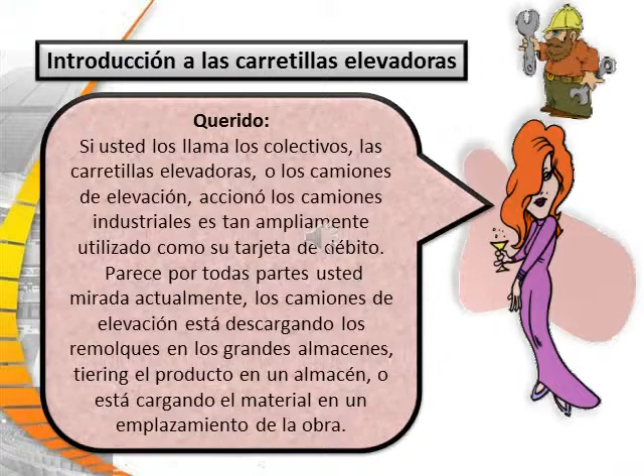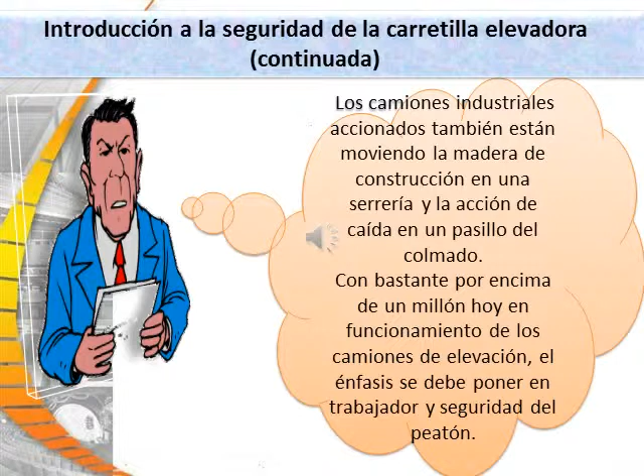Powered industrial trucks are also moving lumber in a sawmill and dropping stock in the grocery store aisle. With well over 1 million trucks in operation today, the emphasis must be placed on both the worker and pedestrian safety. This program will help you understand OSHA safety and health regulations governing these pieces of equipment, in addition to providing you with assistance in developing a training program for your lift truck operators, as well as other affected employees.

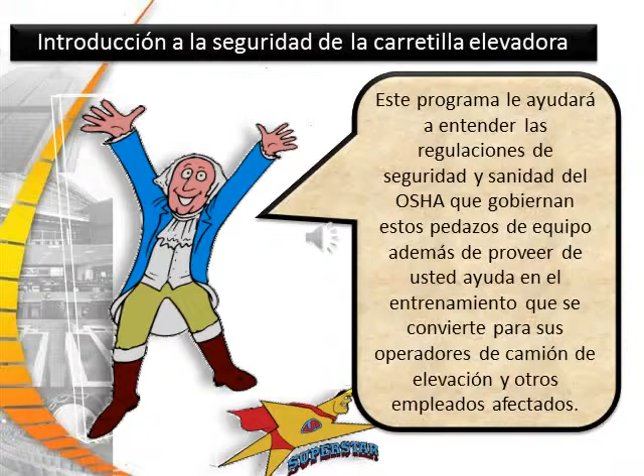What are the objectives of this program? Well, my fellow Americans, here they are. Review the OSHA Subpart N, 29 CFR 1910.178 for powered industrial trucks, and we'll discuss the fundamental safe work practices for the operation of powered industrial trucks.

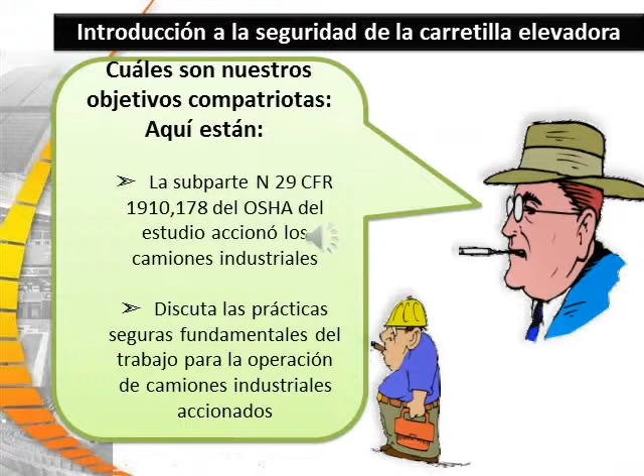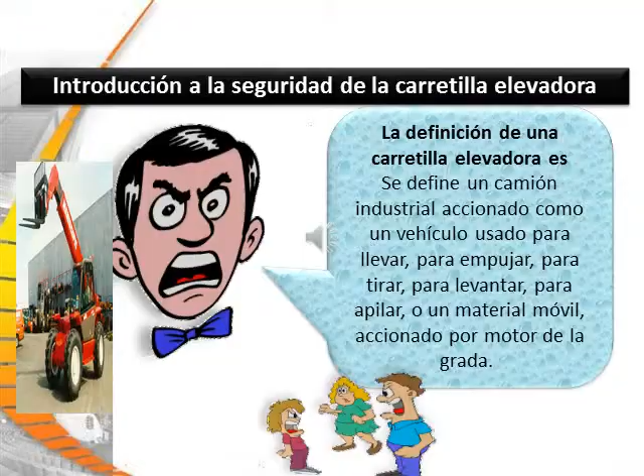The definition of a forklift is a powered industrial truck with a mobile, power-driven vehicle used to carry, push, pull, lift, stack, or tier material. Vehicles not covered by the powered industrial standard are compressed air or non-flammable compressed gas operated industrial trucks, farm vehicles, vehicles intended primarily for earth moving or over-the-road hauling.

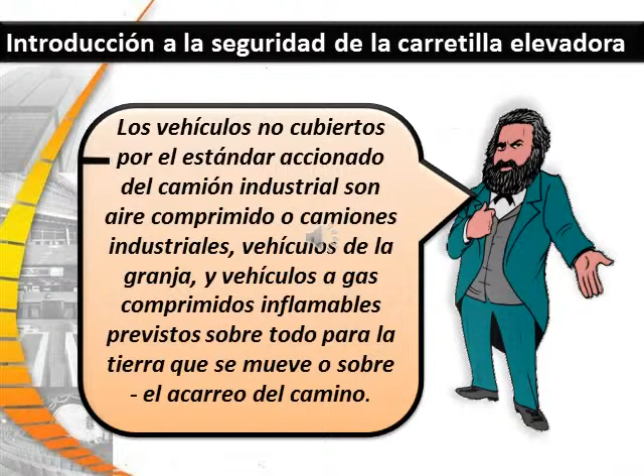Part 2, OSHA forklift requirements. Design and construction of powered industrial trucks must be done in compliance with ANSI, American National Standard Institute, B56.1. B56.1, 1993, is a safety standard for low-lift, high-lift trucks, in its latest revision. All nameplates and markings must be in place and be readable under the standard.

All modifications and additions which affect the safe operation and capacity must be approved by the manufacturer. Data labels must be changed accordingly, and this approval must be in writing from the manufacturer. If using front-end attachments other than the manufacturer's, the truck must be marked identifying the attachment, listing the approximate combined weight of the truck and attachment at the maximum elevation with a center load.

Most vertical mast forklifts are equipped with FOPS, Falling Object Protective Structures. A load backrest, or LBR, must be provided when handling small objects or unbanded units. The LBR must be capable in size and strength to prevent the load or any part of the load from falling toward the operator. The LBR must not interfere with the operator's visibility and guard openings must not be larger than 6 inches in one of the 2 dimensions.

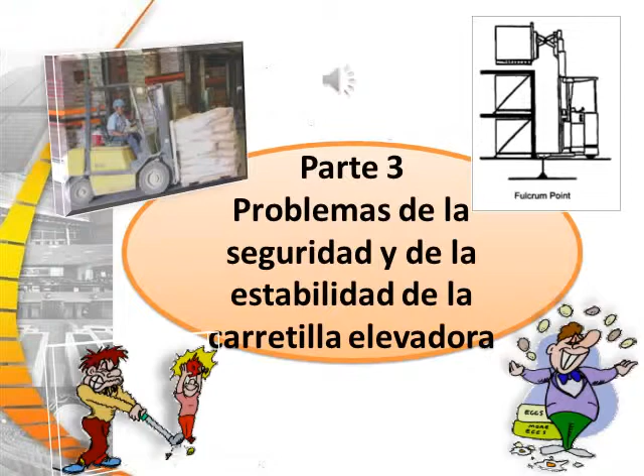Part 3, Forklift Safety and Stability Issues. The lift truck is based on the principle of 2 weights balanced on opposite sides of a pivot point. The forward wheels are the fulcrum. This is the same principle used for the teeter-totter. A properly loaded lift truck does not exceed the rated capacity of the truck listed on the truck's data plate.

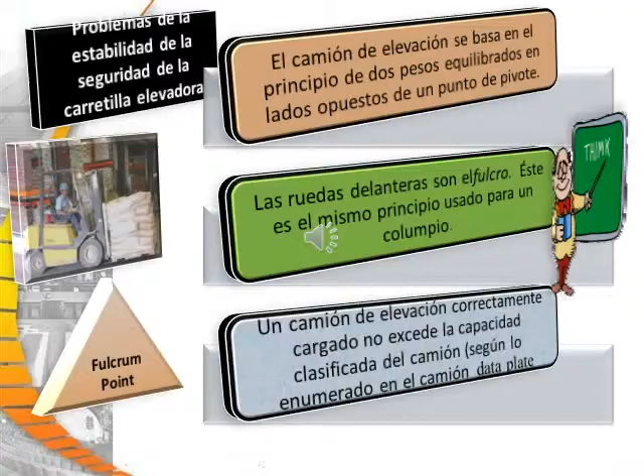The center of gravity, or CG, of any object is a single point about which the object is balanced in all directions. Every object has a CG. The lift truck has moving parts and therefore has a CG that moves. The CG moves forward and back as the upright is tilted forward and back. And as you can see, the CG will move up and down as the upright moves up and down.

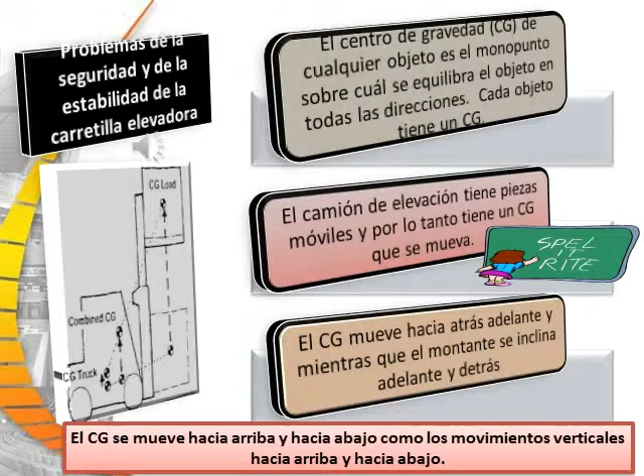When a lift truck picks up a load, the truck and load have a new combined CG. The stability of the lift truck is determined by the location of its CG, or if the truck is loaded, the combined CG. In order for the lift truck to be stable, the CG must stay within the area represented in the triangle.

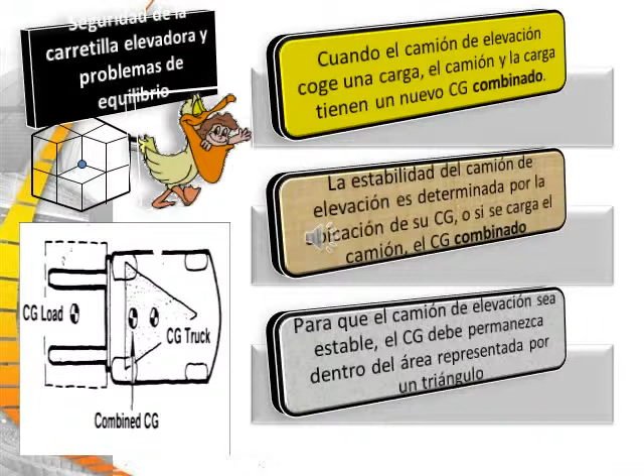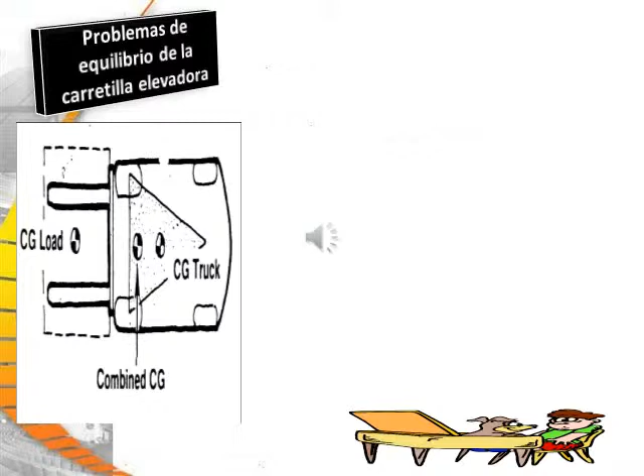A triangle is drawn between the drive wheels and the pivot of the steering axle. This triangle is routinely called the stability triangle. Think of riding a tricycle around corners, and you'll lean forward and you will overturn as you move your CG to the nearest part of the triangle. If the CG moves forward of the drive axle, the truck tends to tip forward, longitudinal. If the CG moves outside the stability triangle, the truck tends to turn on its side, lateral.

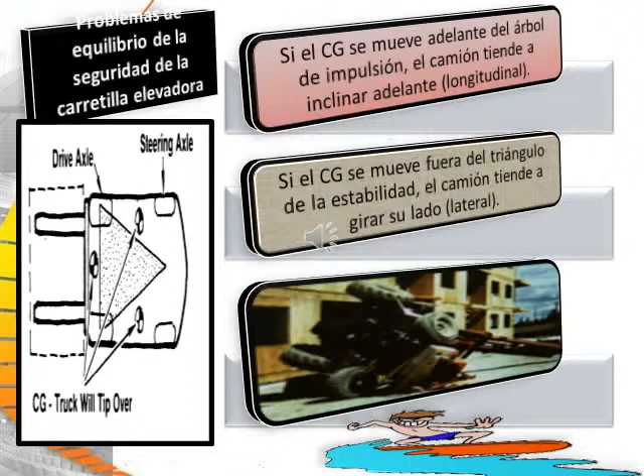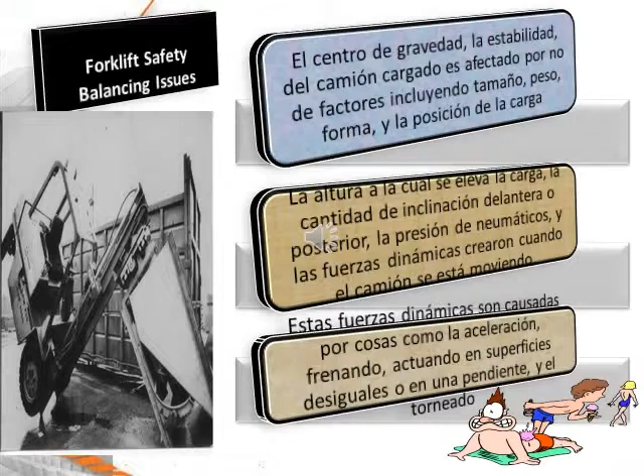The center of gravity, the stability of the loaded truck, is affected by a number of factors including size, weight, shape, and position of the load. The height to which the load is elevated, the amount of forward or backward tilt, tire pressure, and dynamic forces created when the truck is moving. Those dynamic forces are caused by things like acceleration, braking, operating on uneven surfaces, or on inclines or turning.

These factors must be considered when traveling with an unloaded truck as well. An unloaded truck will tip over on its side more easily than a loaded truck with its load in a lowered position. A recent test was done at a lift truck manufacturer's technical center involving a 5,000-pound capacity unloaded lift truck.

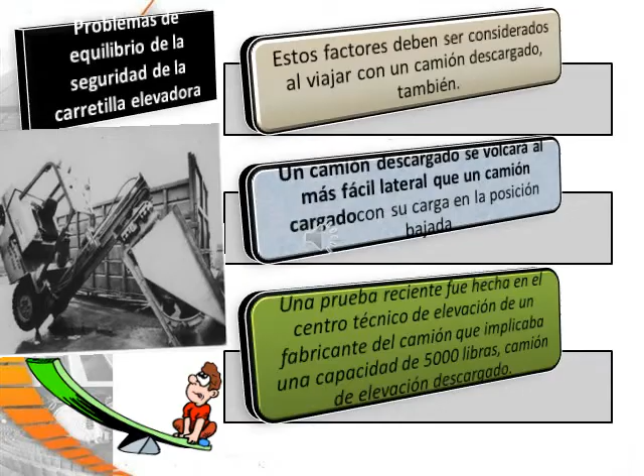In the test at the test center, the three-stage mast was fully extended and tilted back. One man was able to tip the truck over simply by grabbing and pulling the overhead guard.

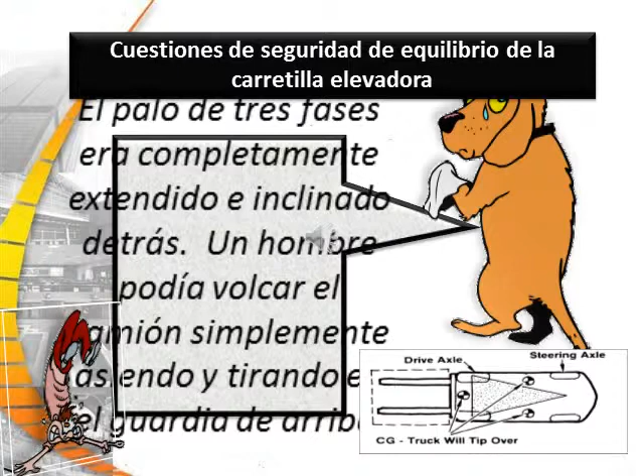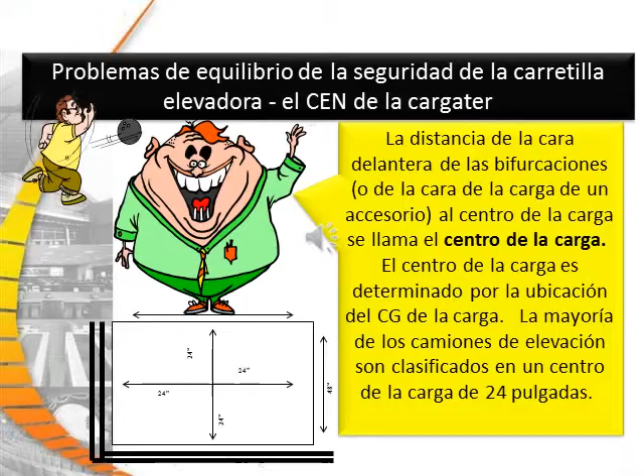The distance from the front face of the forks, or the load face of the attachment, to the center of the load is called the load center. The load center is determined by the location of the CG of the load. Most lift trucks are rated at a load center of 24 inches. When the load is carried a greater distance than the load center, the maximum capacity of the truck is exceeded. The use of special attachments instead of forks will also reduce the nominal capacity of the lift trucks.

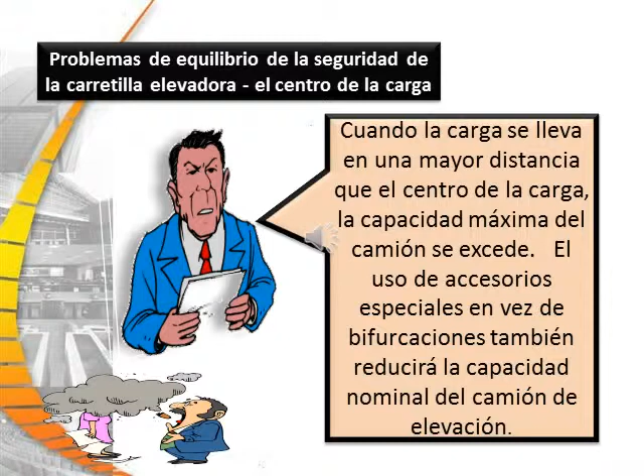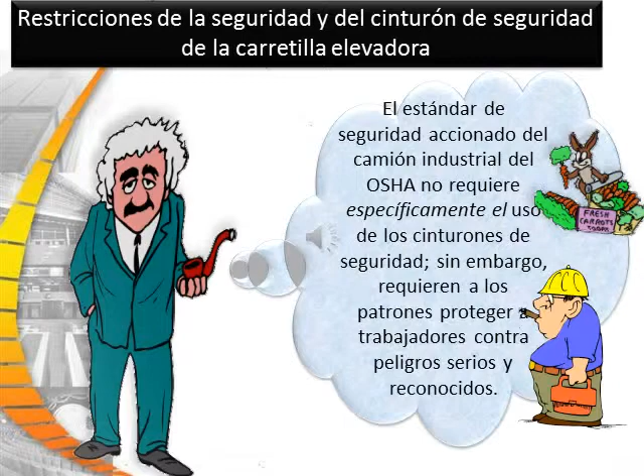OSHA's Powered Industrial Truck Safety Standard does not specifically require the use of seat belts. However, employers are required to protect workers from serious and recognized hazards. The current version of the ASME B56.1, 1993, does contain provisions for operator restraint use. Furthermore, employers are expected to strictly adhere to the equipment manufacturer's recommendations. Most industrial truck manufacturers recommend the use of operator restraints and install operator restraint systems on new sit-down trucks.

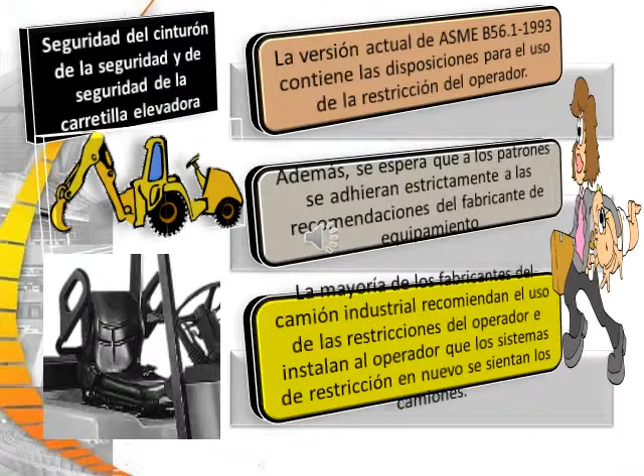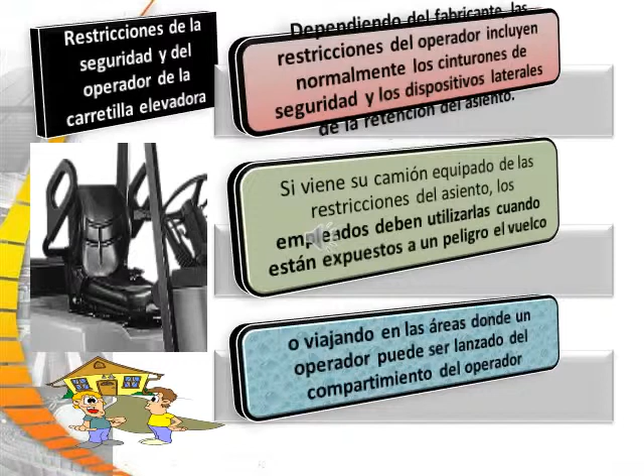Depending upon the manufacturer, operator restraints normally include seat belts and side seat retention devices. If your truck comes equipped with seat restraints, employees must use them when exposed to an overturn hazard, or traveling in areas where an operator can be thrown from the operator's compartment.

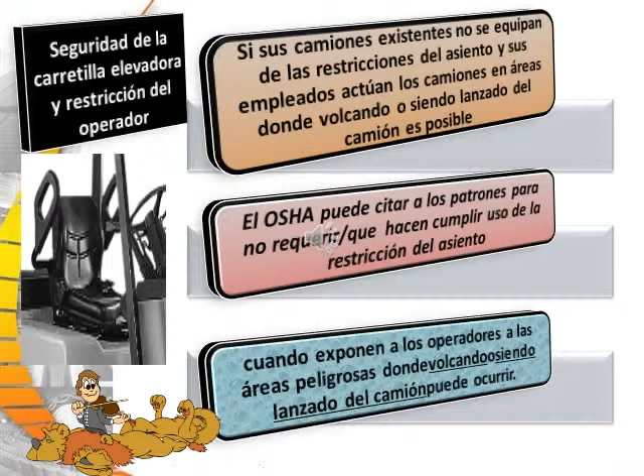If existing trucks are not equipped with seat restraints, and your employees operate the trucks in areas where overturning or being thrown from the truck is possible, OSHA can cite employers for not requiring or enforcing seat restraint use when operators are exposed to hazardous areas where overturning or being thrown from a truck can occur.

In addition to evaluating contributing factors, the compliance officer will evaluate training and supervision to substantiate a citation. OSHA can also cite employers for not taking advantage of approved retrofit kits if those hazards exist. Competent operators should be able to recognize those hazardous areas or exposures where overturning or being thrown from a truck can exist.

Part 4. Forklift Safety Hazards. A summary of OSHA's forklift safety hazards would have the physical hazards as speeding, loading docks, ramps or inclines, or other vehicle traffic. Undefined traffic lanes or driving surfaces which would be rough or uneven. Tight areas, speed bumps, debris in a roadway, uneven tire pressure, or railroad tracks.

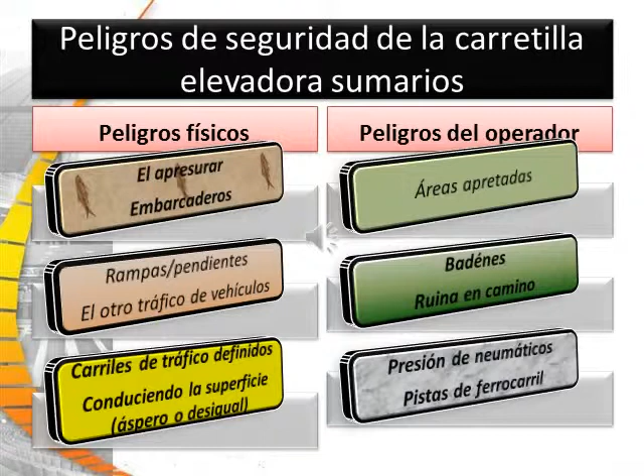Additional safety hazards include potholes, slick surfaces, a CG outside the stability triangle. An unloaded truck is less stable than a properly loaded truck.

Part 5. Maintenance issues on forklifts. A summary of forklift maintenance issues includes defective or unadjusted brakes, a damaged mast chain, play in the steering, sparks from an exhaust truck, an inoperable horn, defective controls, a damaged chain anchor pin, worn tires or damaged rims, inoperable gauges, the forklift is not running well or missing, a dislodged defective counterweight, or a damaged overhead guard, LBR.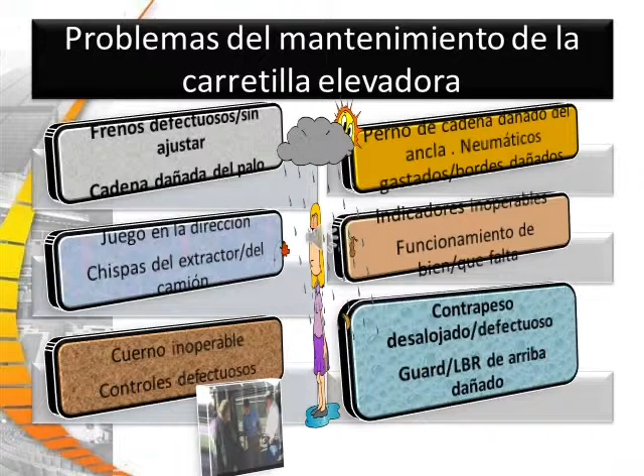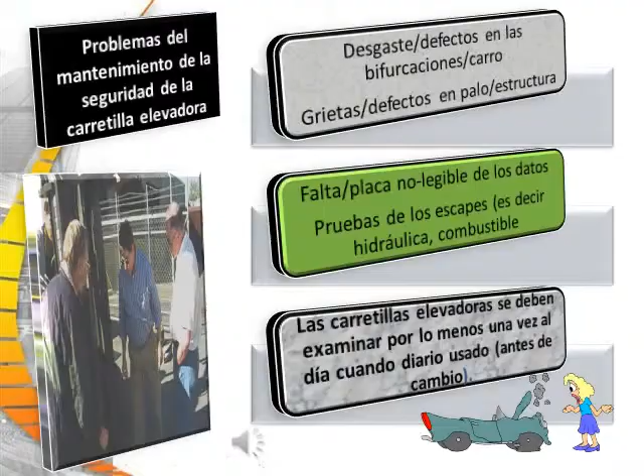Additional issues include wear defects in the forks or the carriage, cracks or defects in the mast or structure, a missing or non-legible data plate, evidence of leaks such as hydraulics or fuel. The forklifts must be inspected at least once a day when used daily, before the shift. Additional forklift safety maintenance issues include when used around the clock, they must be inspected after each shift. The best practice would be before the shift and after each shift.

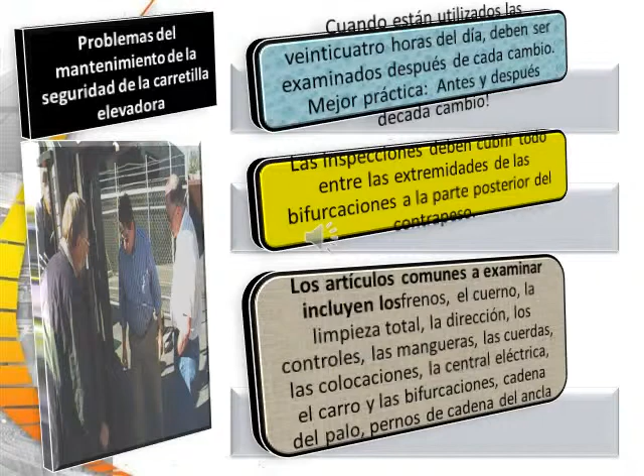Inspections should cover everything from the tips of the forks to the back of the counterweight. Common items to include: the brakes, the horns, overall cleanliness, steering, controls, the hoses, the ropes, fittings, power plant, carriage, the forks, the mast chain, and the chain anchor pins. Other maintenance items include the tires and rims, a counterweight, gauges and guarding, data plates, fluids, battery, attachments.

Replacement parts must be equivalent in safety to those that were used with the original design. ASME B56 calls for a safety standard for low and high lift trucks, and this industry consensus standard is available online. Of course, your operator's manual should have the maintenance and inspection guidelines, and they're often in checklist form. They're also available online at OSHA.gov at the address provided.

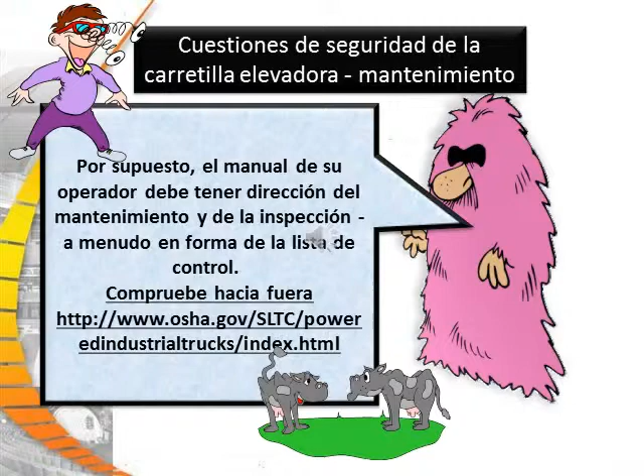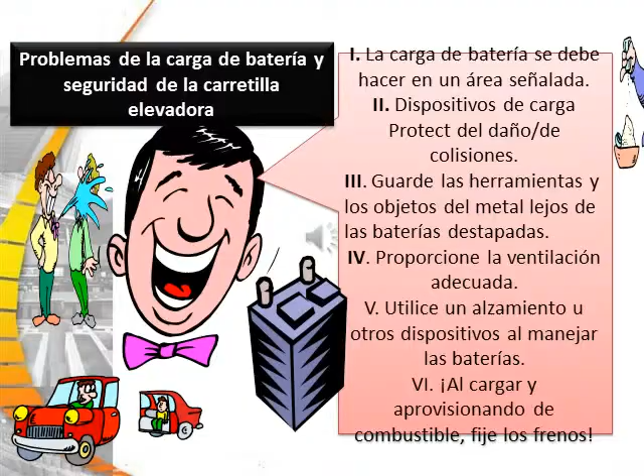Battery charging must be done in a designated area. The charging devices must be protected from damage or collisions, and keep metal tools and objects away from uncovered batteries. You will provide adequate ventilation, use a hoist or other device when handling batteries, and when charging or fueling, set the brakes. No open flame, sparks, or electric arcs. And of course, no smoking, and wear your personal protective equipment if needed.

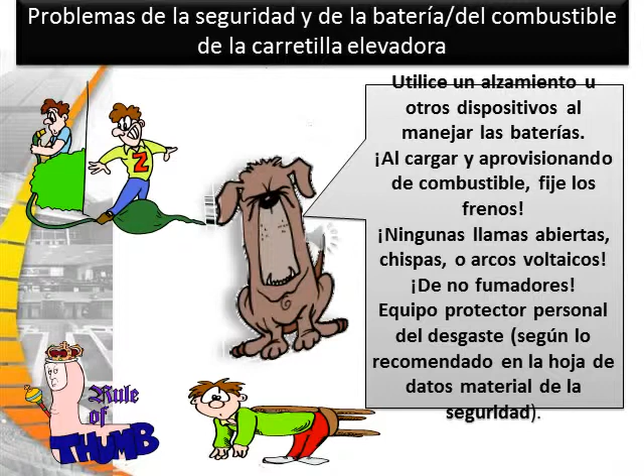In Florida, as well as other states, you must be licensed to make any repairs or modifications to an LP-powered truck or LP tank. Never overfill the propane tank, and check the certification date on the tank periodically to determine compliance.

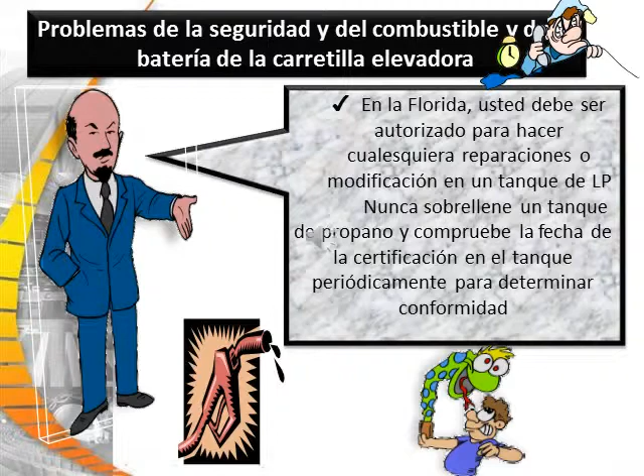Part 6. Matching the correct forklift with the work environment.

Only approved or designated powered industrial trucks can be used in flammable or explosive environments. The complete listing of approved trucks and the certain atmospheres they can be operated in are found in Subpart N, 1910.178(c), specifically Table N-1.

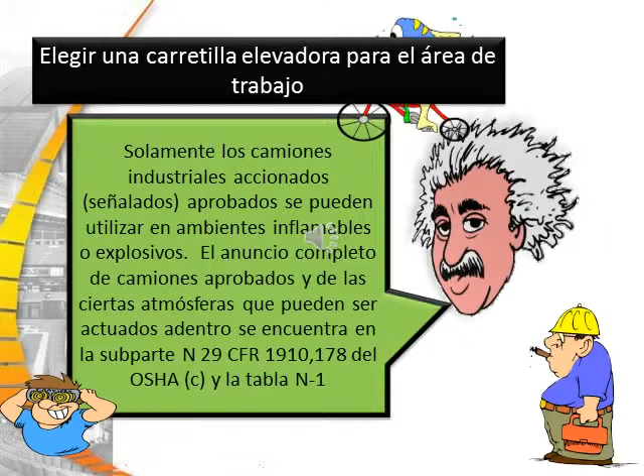Okay, as far as selecting the proper forklift for the right work environment, we can see where the D type of forklift is a diesel powered truck having minimum accepted safeguards against fire and explosion hazards. Whereas at the far end of the scale you have the EE, which is the electrically powered truck with safeguards of the ES truck, in addition to electric motors and all other electrical equipment completely enclosed.

An ES truck is an electrically powered truck with safeguards to the electrical system to prevent the emission of hazardous sparks and to limit the surface temperatures. An E truck would be simply an electric truck having minimum accepted standards against fire or explosion hazards.

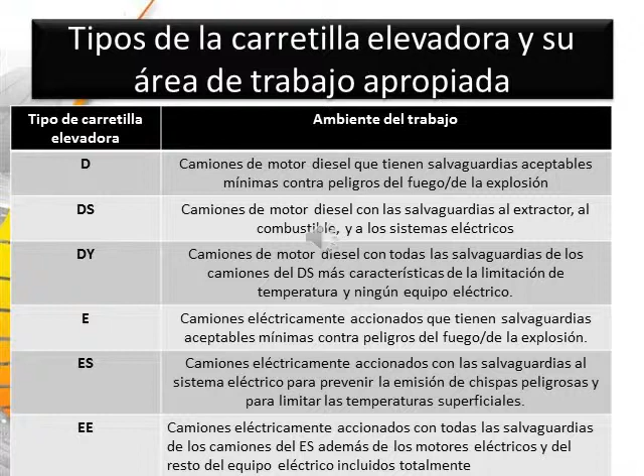Here we can see additional forklift types. The EX, which is the electrically powered truck. It differs from E, ES, and EE trucks in that electric fittings and equipment are so designed and constructed and assembled that the truck may be used in certain atmospheres containing flammable vapors or dust.

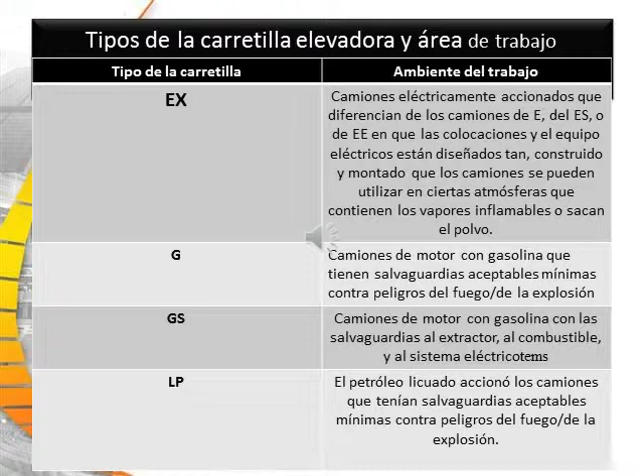A gasoline-powered truck will have the minimum accepted safeguards against fire or explosion hazards. A GS truck will have the gas-powered truck with safeguards to the exhaust, the fuel, and electrical systems. An LP truck will have the minimum accepted safeguards against fire explosion hazards. The LPS truck is liquefied petroleum-powered trucks with safeguards to the exhaust, the fuel, and electric systems. A CNG truck is simply a compressed natural gas-powered truck.

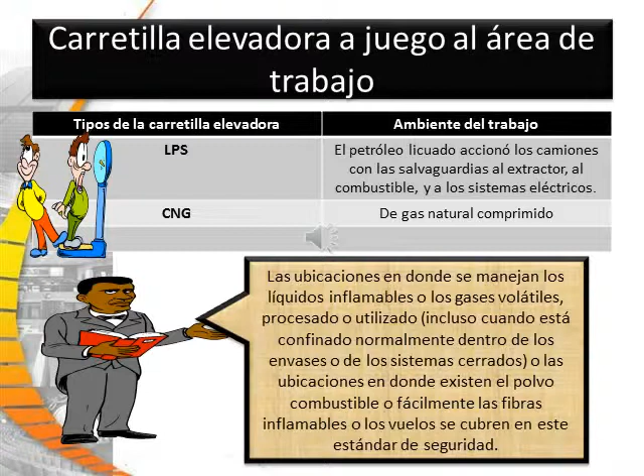Locations where volatile flammable liquids and gases are handled, processed, or used in confined containers or systems, or locations where combustible dusts or easily ignitable fibers and flyings are present, are covered under the safety standard.

Part 7. Loading trucks, tank cars, and trailers. Trailer brakes set and wheels chocked. Inspect the trailer floor for weakened sections, holes, rot, slick conditions, etc. The directional lighting also might be needed. Use fixed jack stands to support the trailer when not coupled with the tractor. National consensus standards allow powered industrial trucks equipped with specially designed devices to open and close railroad freight car doors.

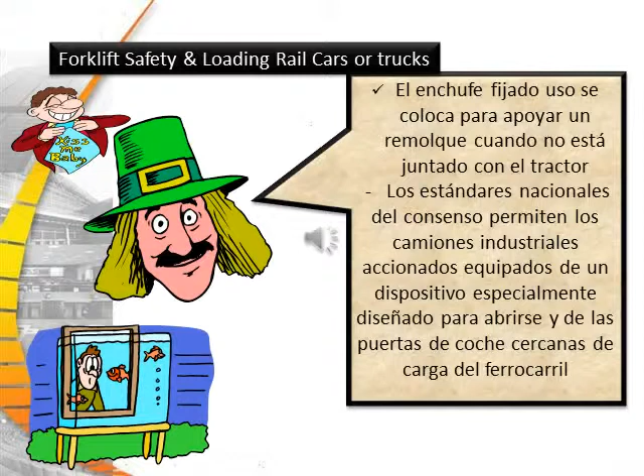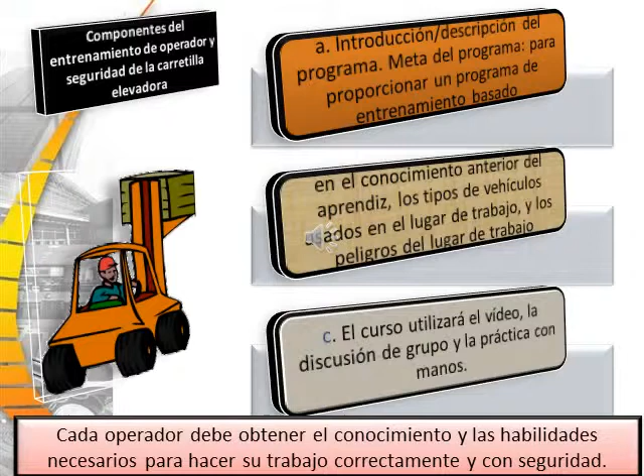Part 8. Operator Training Requirements. The first part in properly training an operator is to give them an introduction or overview of the training program, as well as indoctrinating them into the goals of the program which they are about to undertake, with the trainee's prior knowledge of the types of vehicles used in the workplace and the hazards in the workplace. The course will utilize video, group discussion, and hands-on practice. Each operator must obtain the knowledge and skills needed to do the job safely and correctly.

Number 2, types, features, and physics. Familiarize each operator with the basic types and functions of powered industrial trucks. Develop an understanding of the information shown on the data plate. Understand the critical truck dimensions that affect the safety of the truck. Understand the forces that cause tip-overs and truck design considerations, as well as safety ratings that prevent them, including the stability triangle.

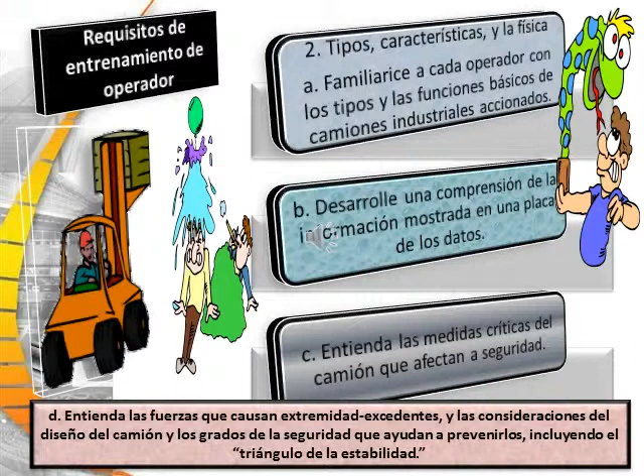Number 3 in training the operator correctly is inspecting the vehicle. Understanding the purpose and importance of pre-operational checkouts. Providing a basic understanding of areas covered during pre-operational checkout. Familiarizing each operator with the checklist for pre-operational checkouts and what to do if a problem is discovered.

Gentle folks, driving the truck and understanding the elements of safe movement of a powered industrial truck is important, along with understanding the differences between an automobile and a powered industrial truck. Recognize the safety hazards associated with operating a powered industrial truck.

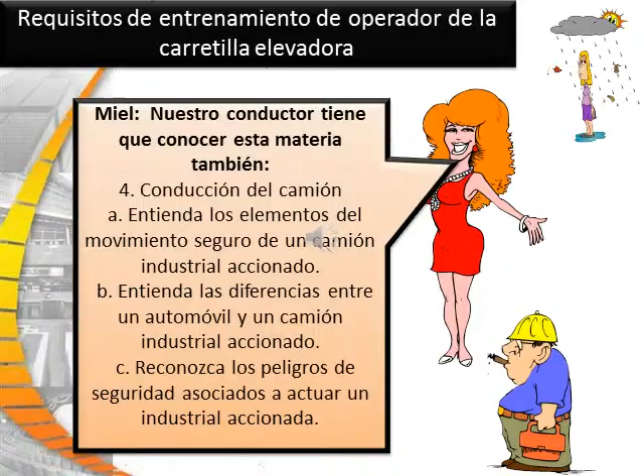Number 5 is load handling ability. Understand the elements of load lifting safety. Understand the safe operating procedures of raising and lowering a load in the aisles. Understand LPG for lift trucks. Discuss LPG and its properties. Understanding the elements and procedures of safely refueling internal combustion vehicles.

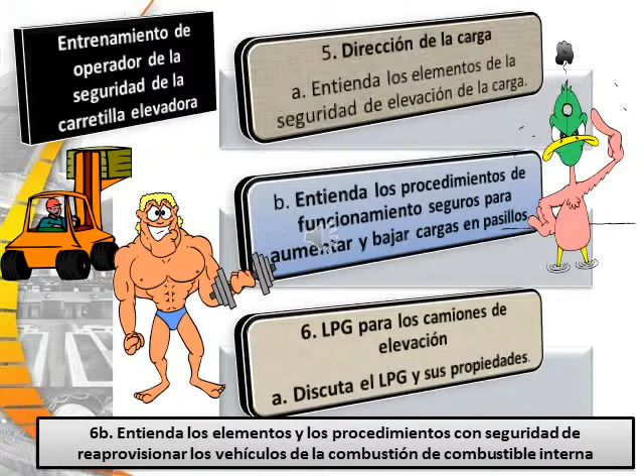Number 7, discuss LPG for lift trucks. Describe the tank components and service valve and surge valve and relief valve, as well as safety-related issues. Discuss the battery and the charging procedures. Understand the elements of procedures for safely changing and charging batteries, as well as filling procedures and maintenance. Discuss all safety-related issues.

Safety concerns. Review and reinforce the potential for serious injuries, as well as review and reinforce safety procedures for your specific facilities, as well as do the hands-on training for specific workplace situations, reviewing the features of a specific PIT to be operated.

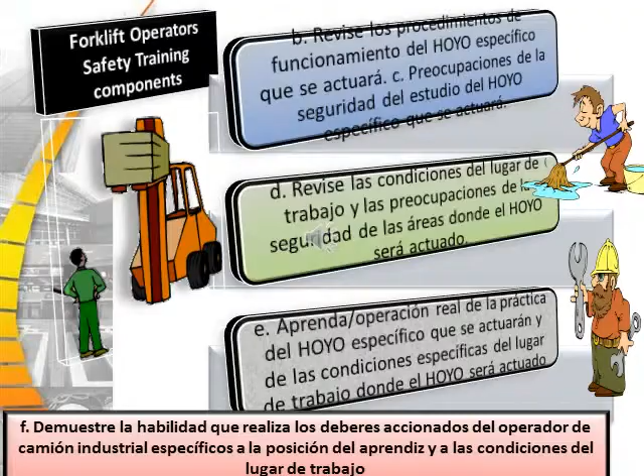Review operating procedures for specific PIT as well as safety concerns. Review the workplace conditions and safety concerns, learning and practicing actual operation of specific PITs and specific workplace conditions, while demonstrating a proficiency in performing powered industrial truck duties. Last but not least, issue the operator a certificate of completion, good for 3 years.

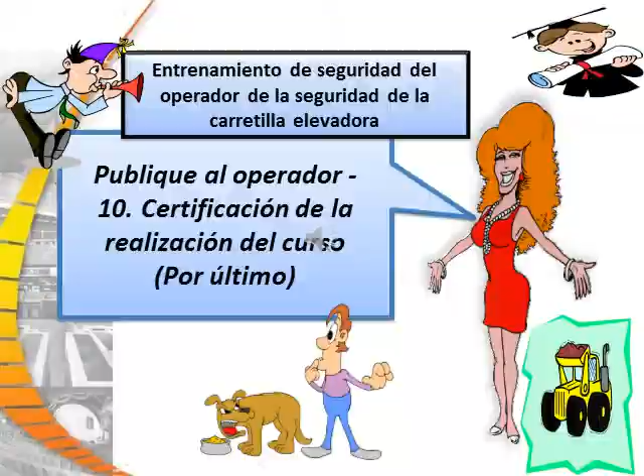Forklift Safety Summary. Begin by IDing all potential users for operator training. ID all potential workplace hazards. Clearly enunciate company policy for forklift use in the workplace. Obtain a copy of the manufacturer's operating manual. When handling flammables, use NFPA controls. And match the right forklift for the right workplace.